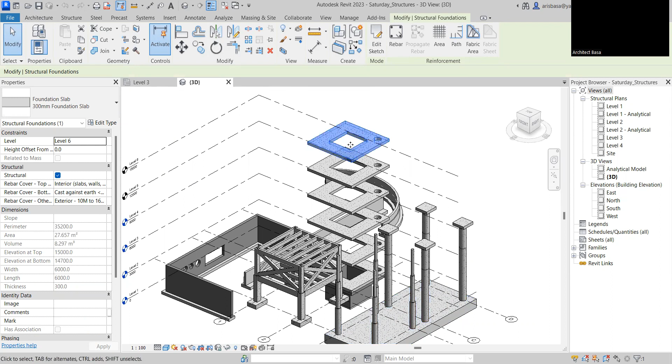Standalone. So we did a standalone structural modeling. Meron tayong footing. Tandaan nyo naman yan, di ba? Yung mga columns. Tapos we also did slabs na mayroong opening. Yan, nag-cut din tayo dun sa mga structural wall ng opening. So all these components gagamitin natin when we do the structural model of the building that we have.

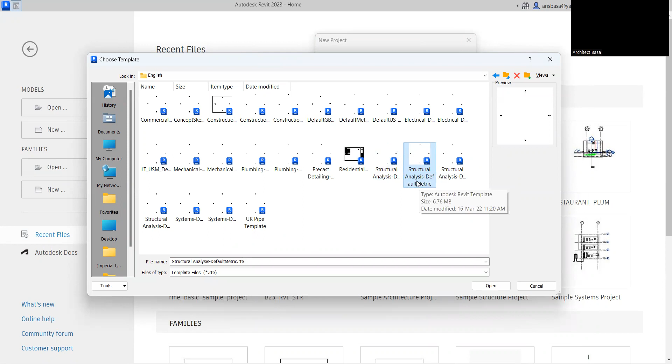So just remember, when we create something in a structure, it comes from the level going down. In architectural, from the level going up. So it serves as the support. So now we will start a new file, which will be a template. Let's go to the English template. Structural default. Go for the structural analysis. It's called structural analysis default metric. This template, it's in that folder. Then click open. New project.

All right. So the workflow that we'll follow is we will bring the architectural model as a link. Lilink natin yan. So we'll insert the link file. I'll go to my folder, documents, in focus, and Saturday building. Okay. Then the positioning will just be auto, internal origin to origin. Then click open.

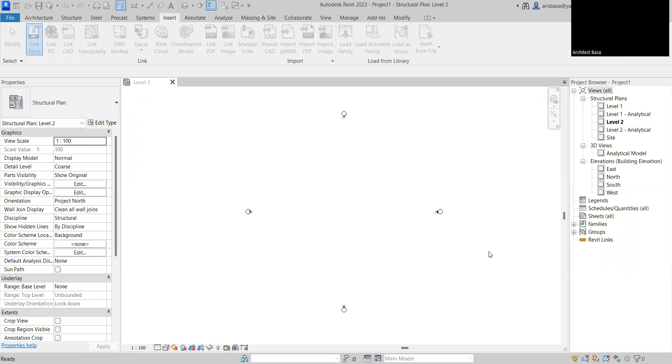So you already have the link. Okay. If we look at the 3D view, you already have the building. Don't be surprised if you don't see some of the other elements. Some of the other elements cannot be seen because they are just switched off in the visibility graphics. Yung VG natin, may mga naka-off lang dyan. See, if I check VV, visibility graphics, makita nyo, some of the elements are switched off.

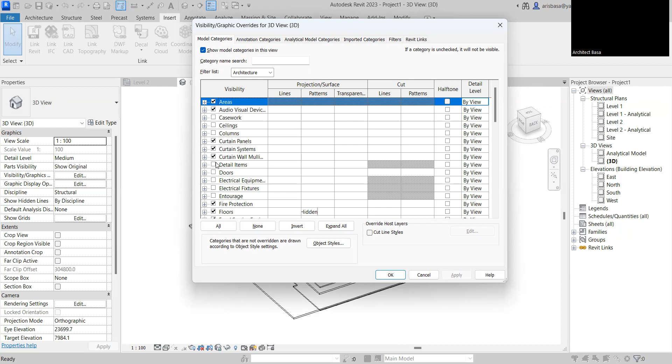Casework means furnitures and etc. And doors are switched off, see? So ngayon, if I switch on the doors, for example, click apply and okay. Yeah, the doors are there. But when you are preparing the structural model, you don't really need to see the doors. So that's the reason they have switched off the doors. So we'll just switch it off. You already have the floors here. We need the walls maybe. So let's put up the walls.

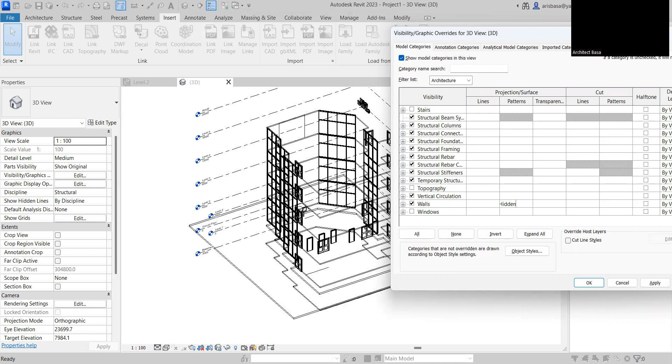So, click natin yung walls. So, if you can see, some of the walls are switched off actually. Yan, naka-hidden siya eh. Hidden yung pattern niya. So, if you want to change that, it will be changed, no? But for now, let's keep it that way and just click cancel. All right. Okay naman tayo sa ganyan.

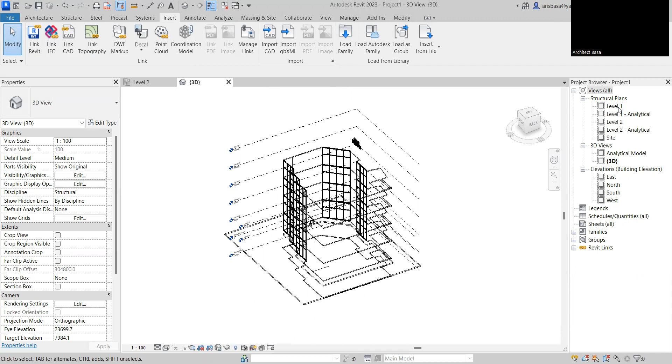So if you remember, in our architectural model, we did not put the grid yet. Do we have a grid there? Wala, no? Meron ba tayong grid doon? Let's try. Let's open the architectural. Usually, this is the link, so we should have the grid. Let's check the grid in the floor plan. Ayun, meron na palang grid. So what we will do is we will borrow the grid of the architectural model because there is no grid in the structural model. We cannot create the columns.

If you remember in the plan that we did last week, when we placed the columns, we had grids, because we place the columns on the grid. So we need to create a grid and level also for the structural model. But we will not be creating it from scratch. We will copy it from the link model. If you look first here in the north elevation, we have the levels already. In the elevation, you can see the doors, even the plants and the cars, because it has different visibility graphic settings.

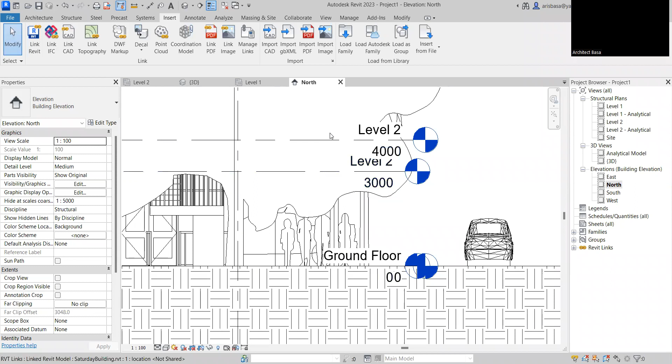So if I look deeply here in the levels, I see two levels that belong to the structural model. Itong dalawang to. I can actually click this and move them away. See, it's level 1 and level 2, the default levels. So what I can do now is modify this to match the level of the architectural model. So it's 4,000 for level 2. So I'll just modify this and type 4,000. Okay.

So there are two ways to create your own structural levels. It's either you just copy this and align it to the other levels, or we copy from the link, which is faster. So you go to your Collaborate tab. Then we use the tool Copy/Monitor. Click Copy/Monitor and choose Select Link. We'll select the link, which is this link. Then click Copy and select this level. It's copying now. Then this level, and that level. You will see that symbol; it is being copied and monitored.

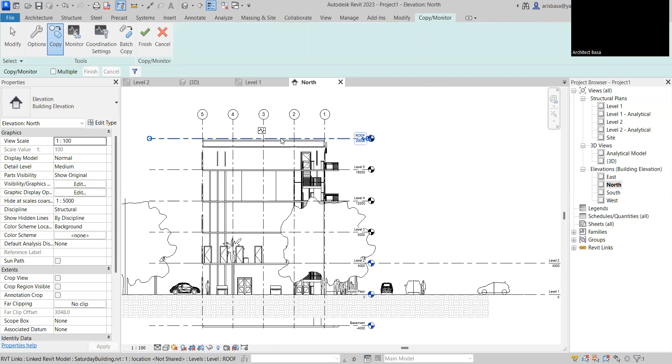What is the reason we have this monitor? If you change the height of the levels, it will send a report to Revit that you have changed the level, because it is critical in construction that you have similar levels. So now we have already copied that. We can now move these levels and align them to the other levels. So now these are our structural levels. We have now the roof and level. We don't see it yet here. So how do we do that? But first, let's finish the process of copying.

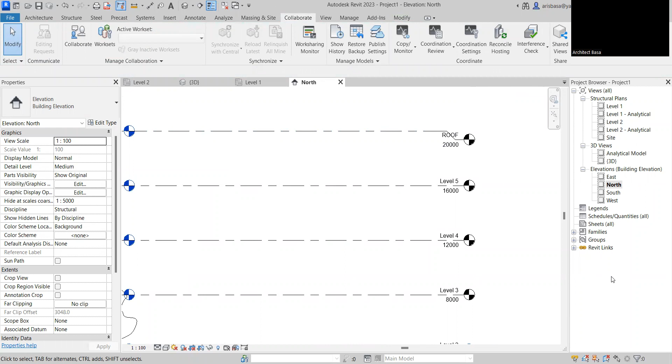Finish that. So for us to see the level 3 structural plan up to the roof, in the project browser, what do we do? Tandaan nyo ba yan? View. But this time, plan views, structural plan naman. We go to structural plan and we get all of these levels. And click OK. See, it will now turn blue. It's now blue because the levels are already there.

It will also help if we select all these levels and pin them, so that we're sure they will not be moved. Okay, so now we have our levels, but we don't have the grid yet.

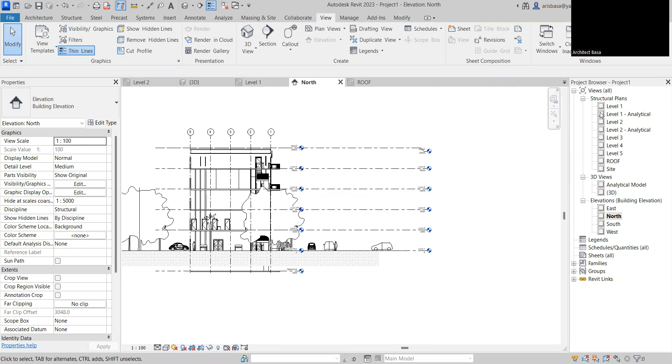So let's create the grid using the same process. Let's go to level 1 and do the same thing: collaborate and copy monitor, use the link, select this link, and this time we'll copy again.

One by one, takes time to copy: 1, 2, 3, 4, 5, 6 grids, and then the vertical grids, 7, 8, 9, 10, 11. So we already copied that, and then we click finish.

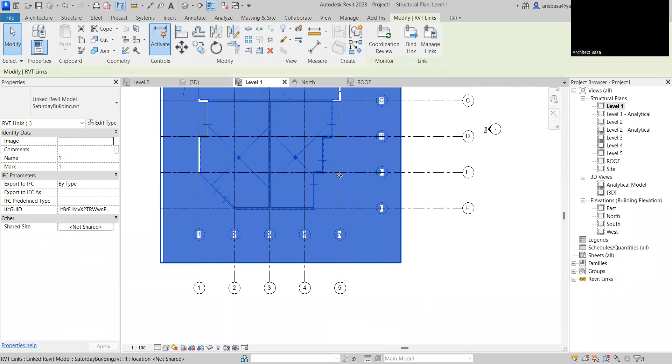So for us to identify the structural model, let's move it away from the architectural grid, similar way to this. Let's lower it down. Okay, so the architectural grid is still there, and we have copied it as a structural grid.

So to be sure it was not moved, like what we did earlier, we'll just pin this. Click pin, alright? So we know what to do now. What to do next? Create our columns.

But actually we need one more level. If you go to the elevation for the structure, we didn't copy the basement level yet. So we need to copy this basement level.

I won't monitor it, I'll just copy it directly. I'll just copy this, align it here. Okay, so that's the basement. I'll rename this as basement level.

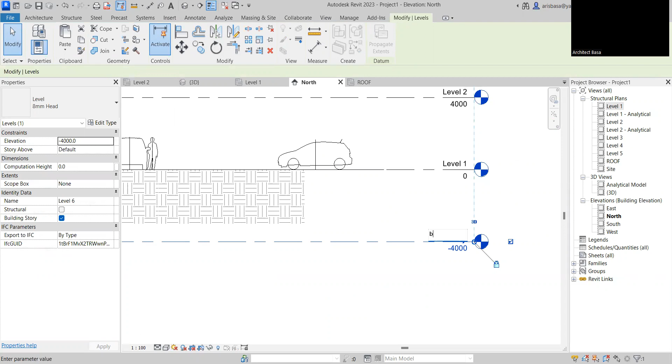Minus 4. So actually we need another level which will be the footing level of our structure. So let's create another level, copy this, another 4 meters maybe. Let's name this as top of footing.

In actual construction, usually if the building is this high, we need to have those pile supports, but we'll just keep it simple. We'll just make an isolated footing for the building.

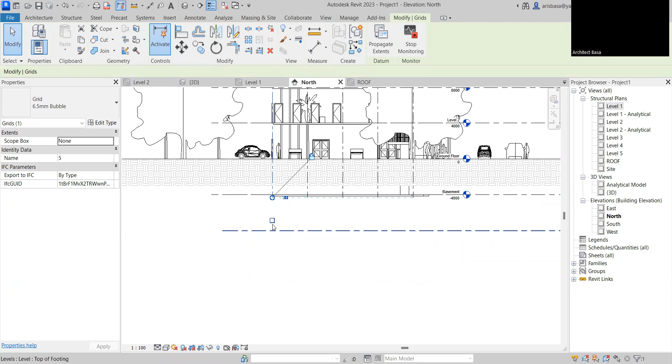So our grid, let's make sure that the grid goes down all the way to the basement level. Same thing: pin, unpin, move it down so that it touches the bottom level. And then let's go to the east elevation.

Do the same thing: select that, unlock, unpin, and then push it down. Okay, we can also adjust the levels here on the right hand side. Lock and unpin, unlock, and then move it.

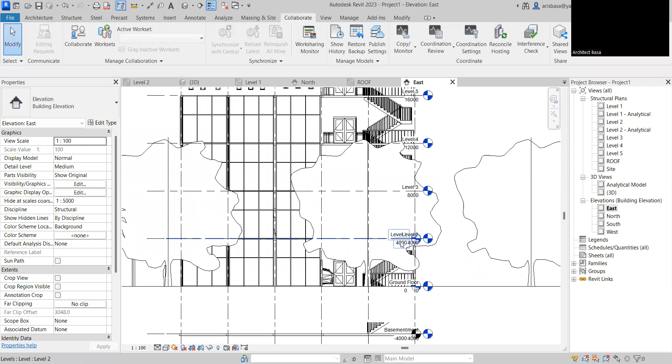It won't move. Sorry, it's just the levels. Levels, unlock. Where's the pin? But it won't move. Oh, it's pinned. Okay, move, unpin.

And let's move this here. Yeah, as a batch, let's pin it. We can move it like that. Okay, then we can now pin them again. Let's just pin that.

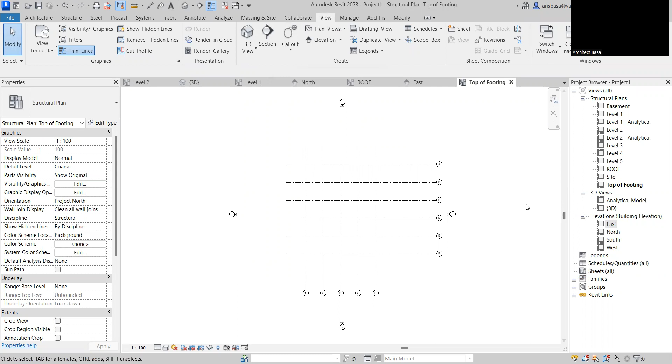Okay, so now let's go to our basement level, which isn't here yet. Again, we'll do what we did earlier: View, plan view, structural plan. Let's get the top of footing and basement level. Okay, there's our level now. Let's go to basement level.

And let's create our columns. Okay, so under structures, by default we have steel column and rectangular column. So let's use the rectangular column right now.

Let's say at the basement level, let's use some big ones, 600 by 450. How to do that? At the grids, right? We'll just click at grids, then select all the grid. There we go, now we have the posts, so we have the columns, and then click check.

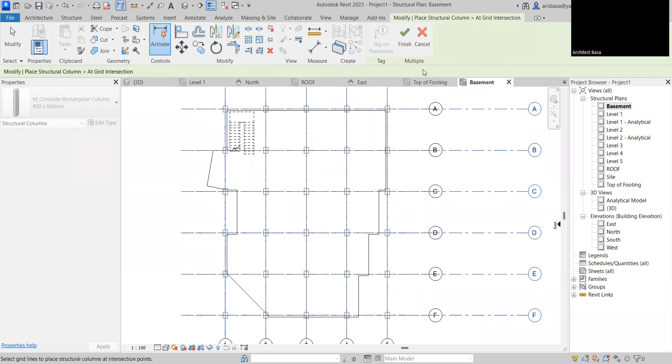So for example, if you have grids with columns that you don't need, you can just delete them. But for the purpose of this class, we'll just keep all of these grids for all of these columns for now. So once you place your columns, check your 3D model.

But before that, let's select all the columns, so all the columns are highlighted, and then let's look at the 3D view. Yeah, so we already created the columns.

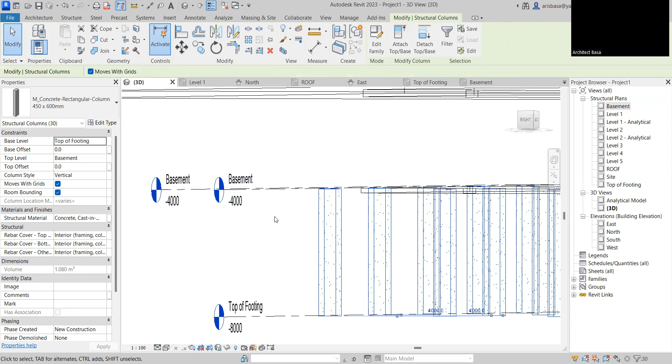So the columns are placed from the basement floor going down to the top of footing, which is good because that serves as the foundation. Okay, so now we can place our footing to each of the columns.

So let's go now. Let's go to our top of footing level and then we create the footing. We'll just use the isolated footing under the structure tab. Click isolated, and then let's choose maybe the big one, 2.4 by 1.8.

And then what we'll be using is add columns. Click add columns, select that, and then you already have the columns in place. And then finish. In the 3D view, it looks like this now. Yeah, right? So we have this.

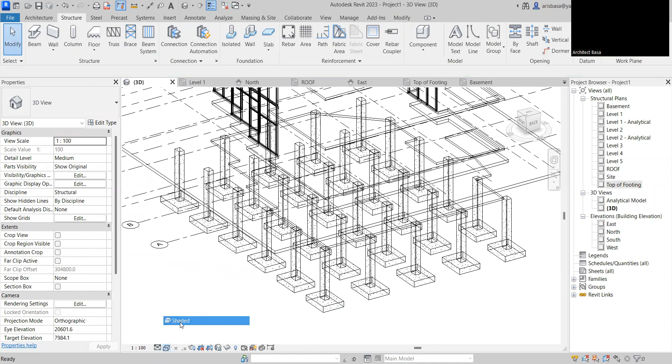This is your shaded view. Okay, you'll have that footing.

Okay, so now what we'll do is we will copy the columns. Select all instances visible in view, so it will select all the columns. And what we'll do, we'll just copy it: copy to clipboard and paste it, align to selected levels.

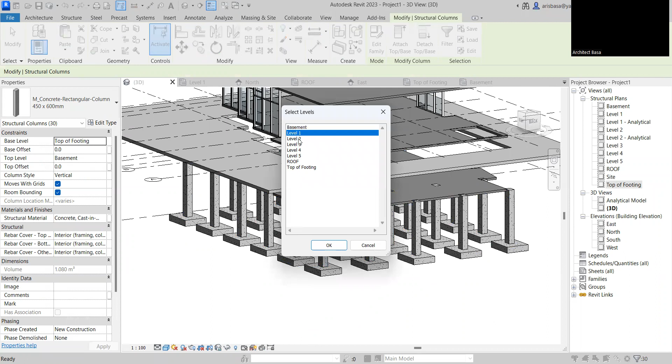So the level that we'll place it to will be level 1. Okay, level 1, click OK, because we start from the bottom going up. So we already have that. So let's say we agree that we'll use the same size.

So it's okay. The same column, we'll place it on the upper floor. It's still copied, so we can paste it again to level 2. Click OK. There it is, level 2.

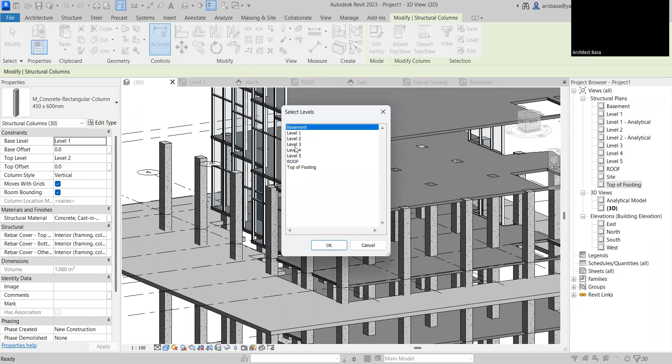Alright, so we have the level 2 columns. Let's say we decided that this column should be a little bit smaller for structural purposes, but I think it should still be this much. Let's just change it on the upper floor. Copy and paste again, align it to level 3. Okay, so those are the columns at level 3.

This time, let's make them smaller. Let's use the 300 by 450. The same thing, let's copy this again and paste it to the other levels, level 4 and level 5, up to the roof, and click OK. So we've placed them up to the roof level.

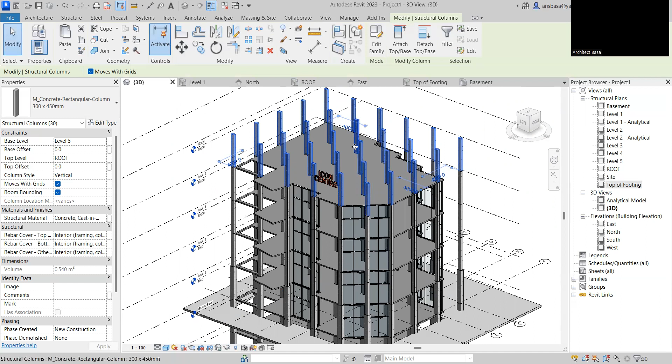Do we need columns on the roof? I think we don't need columns, but we need it on the other side where we have the sloped roof. So what we'll do is remove them manually. We can just select and delete the columns we don't need here.

Manual na lang. Some of the columns that we don't need, we just select and delete. Don't need that there. Actually there is a parapet here, but I don't think we need that big of a column, so we don't need this also. And these other columns, we need to shorten them.

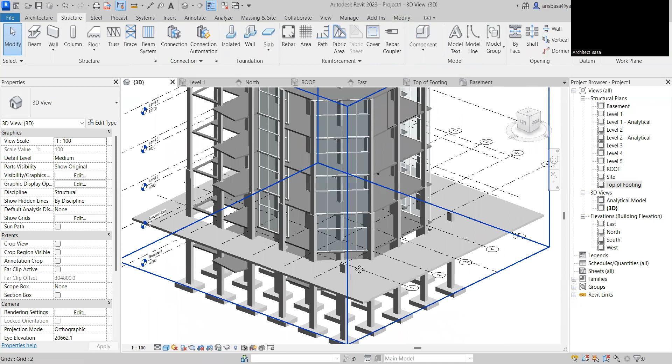So later on we'll adjust that. Some other columns that we don't need, just manually delete them. Here maybe we'll decide later on since we don't know yet where the roof is.

Okay, so we already have the columns and the footing. What is next? Let's create some tie beams at the bottom floor so it won't tip over, for additional support.

So let's create a beam at the top of footing. Let's go to top of footing, and make a tie beam all around. Maybe just this one, all around, and then the one in the middle.

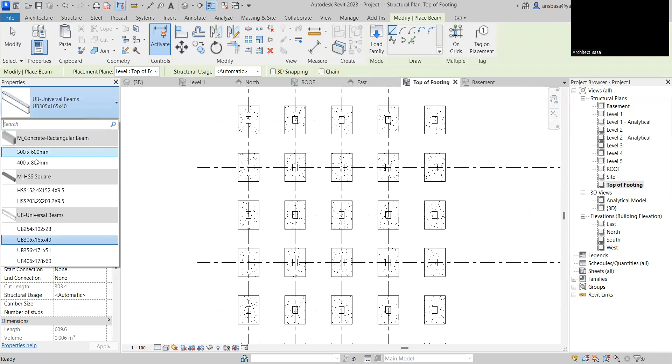So let's go to beam. By default we have the steel beam and the concrete beam. Let's use the 400 by 800. To create a beam you just need to click on the edge of the column from here going to the other side. Wait for it, and that's the beam already.

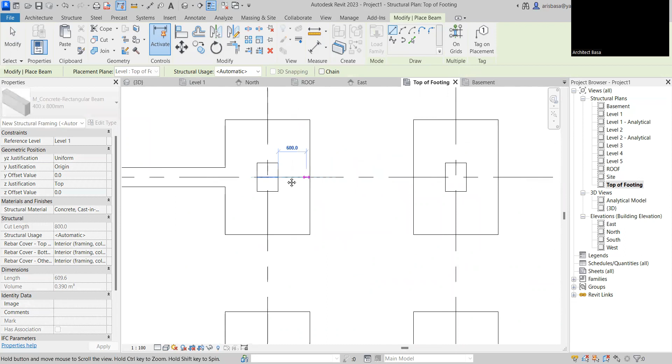So you can do that and click there. You might ask, why don't we just do it from end to end? There will be a clash in the concrete volume, doubling it at the column and at the beam, so we don't want to do that.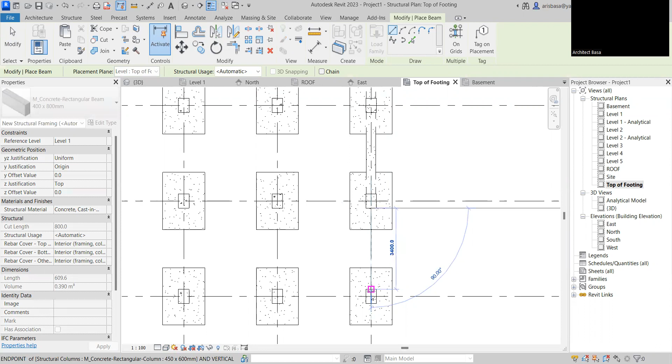Then we just keep doing this, one by one. You can also copy one beam and paste it to the other, but since it's not that much work, it's okay to do this one by one, because sometimes we want to make sure it's attaching to that edge.

Structural modeling is easier than architectural modeling. I will undo that. Since you already know architectural modeling, this is easy now for you.

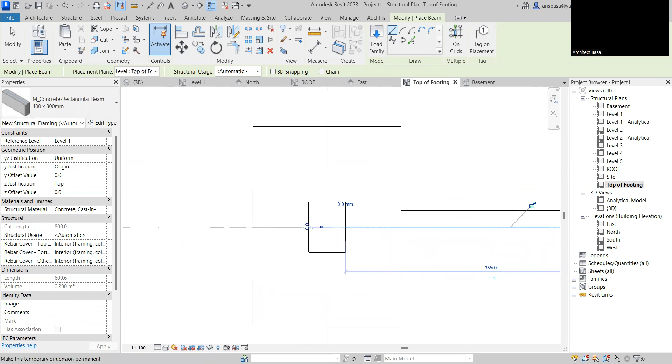The next thing we'll be doing is our slab. If you remember, we did a slab edge, right? Then we'll just do a slab edge.

Let's try to copy the other columns, the beam. I will select, then use the filter tool. I'll remove the columns and remove the foundations so I have only the structural framing.

Do we have a student online? Wala naman, huh? And then we click apply and okay.

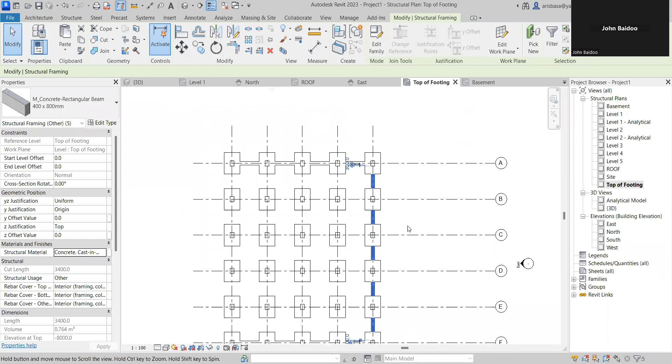So that is only the beams. Then we can copy, I will copy from here.

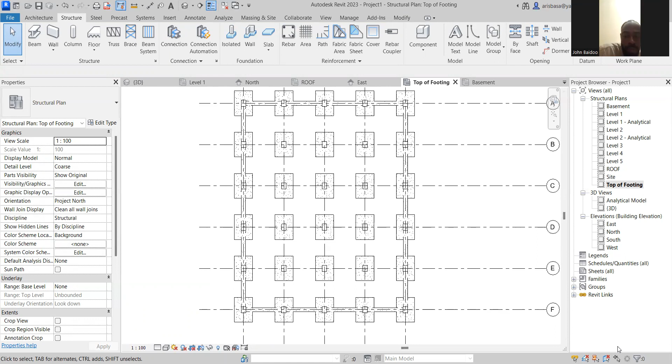Yeah? Can you see me? Hi, we can see you. You're good looking.

John Baidoo, your friend Kuya is waiting for you because he is alone today, nobody is teaching him. I'm sorry, I'll come next week.

Okay, so today we are creating the structural model of our building. Let's look at the 3D now. We already have this, but the beam looks wrong. It's wrong, right? The beam should be on top of the footing.

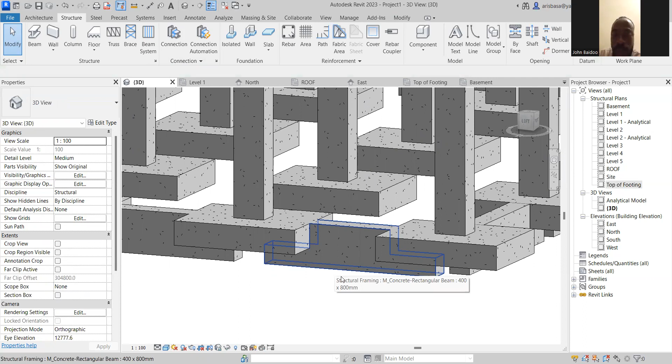So what we will do is modify this. What is the thickness of our beam? It's 800 for the height. So we'll select all the beams, select all instances visible in view. We selected all the beams, so here we will modify it. We will add a start level offset of 800 and also an end level offset, the last end, which is 800 as well.

Yeah, I think this looks better now, it looks more proper. Okay, so if you want it in between the levels, we can increase the height.

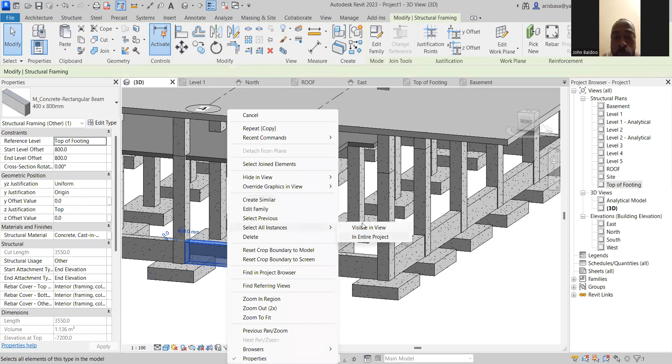So let's do that again. Select everything in the view, and then let's add, maybe let's make it 1,800 or maybe 2,000. 2,000, at least it's in the middle point of the column. Oh, I think that looks better.

Okay, so our structural engineer here, Kuya, has approved it. Okay, so there you go, we already have a beam.

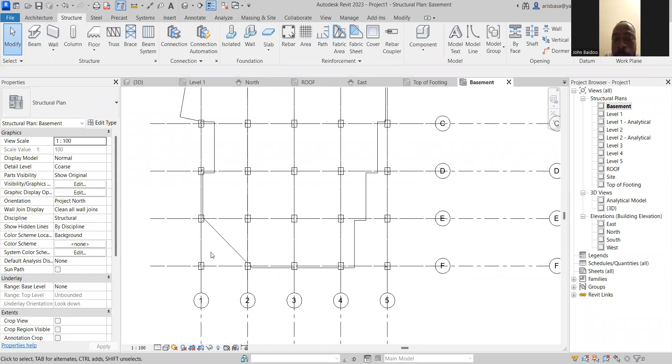So next is to create a slab at the basement level. Let's go to the basement level. So let's assume that the basement level floor will be from column to column. I don't know why we did this at the architectural level. Later on, maybe we will modify the architectural model, and since the owner still owns some part of that land at the bottom floor, we can just use that as the basement level.

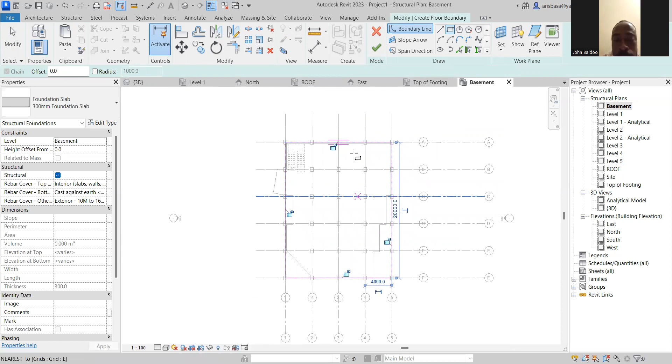So let's create a slab, structural foundation slab. Maybe we'll use a 300 mm thickness, at the basement level, and then we'll just draw a rectangle from this grid up to this grid. So that will be our foundation slab at the basement level, click check, and it looks like this now. Okay, so that will be our foundation slab.

There is actually a clash between our slab and the architectural floor, but usually in actual practice, the structural slab is used as the floor of the basement. We don't want to put additional screed there because it's usually used as a parking area, so they will just paint it with epoxy paint. We don't really need an architectural floor at the basement level. So later on, we will tell the architect that you don't need to create a floor at the basement, just delete your floor and use the structural floor instead.

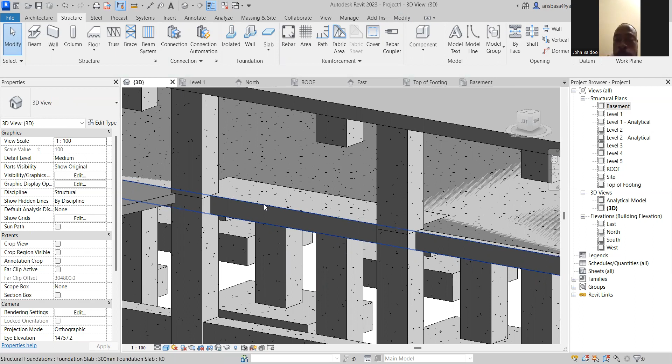Okay, so that should be fine. Now what can we do here? What should be the next thing? Slab edge. So let's create a slab edge around the structural slab that we did. Should be easy, John Baidoo can do this.

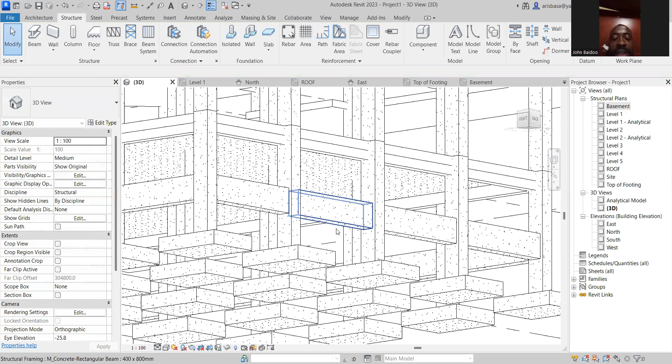John, are you using your laptop or are you on your phone? I'm on my phone. Okay, anyway don't worry, this is being recorded, you can watch this video later on. Okay? You're walking, huh? You're in your house now? You don't have any visitor there or something? Are you sure you don't have any visitor there? No? I mean, yeah, your roommate, maybe your roommate has a visitor today.

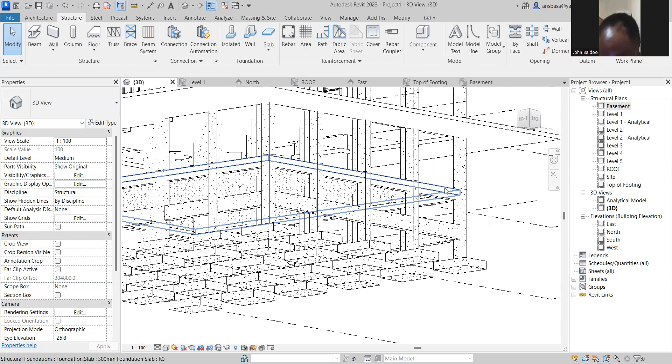Okay, so let's continue. John, we were talking about garri. I'm eating garri now. Yeah, right. So next week you have to bring some garri, so we will let them taste garri. Okay? He's eating garri now. We have to bring some garri next week. Garri photo. Yeah. So we'll give them some garri photo, okay? Okay, I'm eating some right now. Wait, okay. Okay, all right.

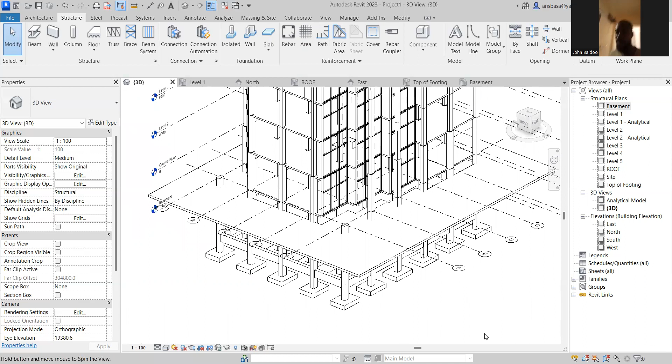So we'll remove some of the other columns that we don't need.

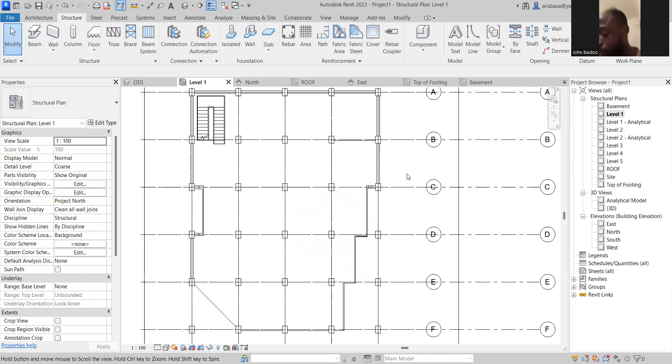So now let's go to the ground floor, level 1, and let's do the same slab. Simple slab. This time we will follow the architectural lines of the architectural slab. So let's do the slab. We'll just use this tool, pick lines, and then choose the lines of the architect's floor. Where is it? This one. The exterior line. This. Just one by one.

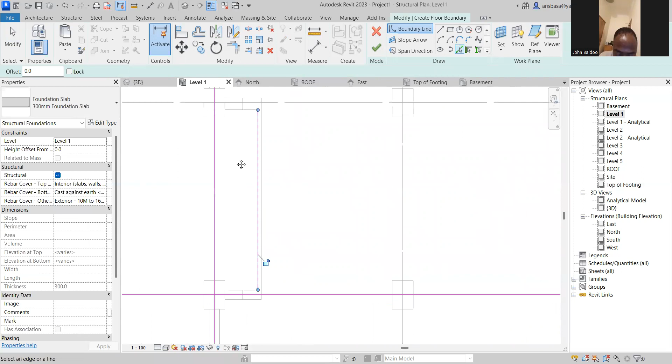Here. The architect's model is a bit off. Anyway, in Revit, we don't really worry about having it super correct because we know that we can easily modify the model later on. Okay. That's the floor. I think we should choose the edge, right? Because that's where the wall is. Okay. Select this and let's delete this.

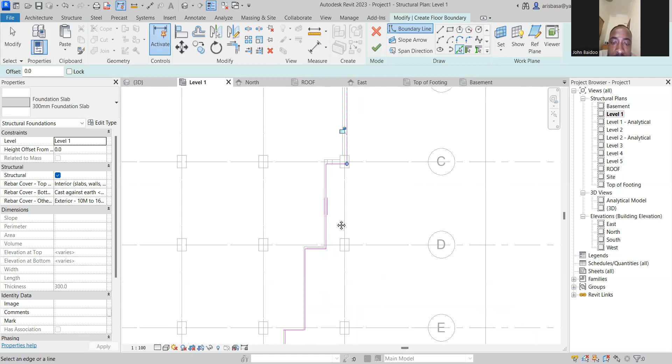Okay, that is closed. We have to make sure that the lines are closed. Select this line as well. And now, I think we need to delete this and select this line. Okay, looks like it's closed. Oh, not yet. Let's choose this and that. Yeah, it looks like it's closed now. We can click check. Oh, there's a message saying lines cannot intersect each other.

So there's a problem. Revit will tell you where the problem is. You can actually see it. If you zoom in, there is a line which is orange. So it will not let you do things that are wrong. So you just click continue. Don't click quit sketching because otherwise it will stop the process. Just click continue. Then you modify what you need to modify here. So it seems like there's a problem here. See there, it is not connected to that.

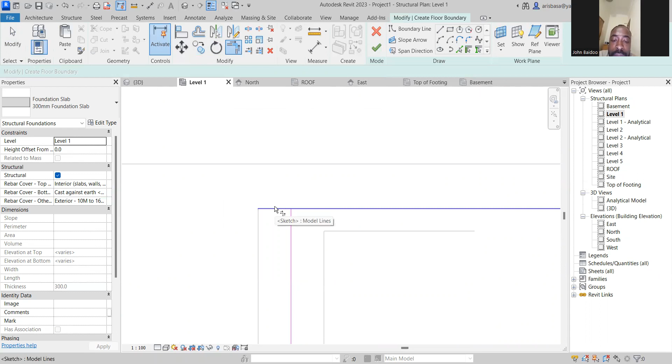So we just use our trim/extend to corner. Click there and here and there. It's now connected. Let's check here. This one has an extra. So if there's an overlap and there's a missing line, you need to close that. I think you already studied that in architectural floors, right? It's similar. Click that and that. And it seems like here also we have a missing line. There's a gap. We close that. So now we seem to have solved the problem.

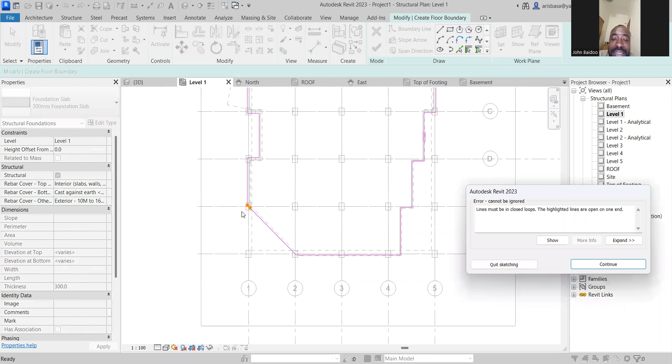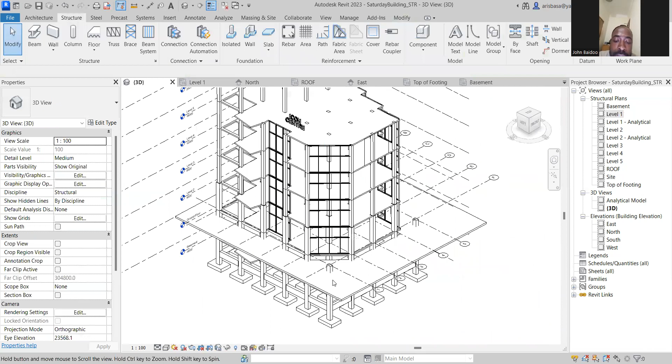We click check. There's still one. So there's a problem, not connected. Click continue. And then we just click and click there. So we'll find out if there's still more problem. Oh, so there's no problem. We'll save this now as our Saturday building underscore str for structural. Okay. And options is 3. Click OK and save it. Okay. All right. So if we look now at our 3D model, we already have the slab for the ground floor. Okay.

So our floors for level 2 up to the roof are typical. So we just need to copy that on the other floors. But here, our problem is we did not give it an offset. It is now clashing with the architectural floor. So what we need to do is give it a height offset of minus 150 because the thickness of the architectural floor is 150. So we go down 150 millimeters below it. So now we don't have any clash.

Our slab now is placed. If I shade this, our slab is now placed just under the architectural floor. Yeah. This is our structural slab. This is the architectural slab.

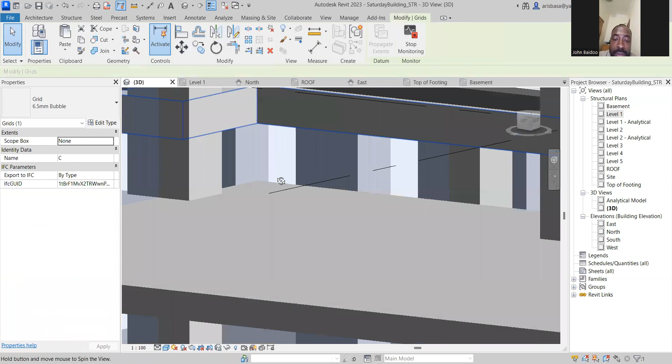No, here we are usually now using flat slab. We don't use any beams here. Sometimes we need some drop panels, but in general we use maybe a 250 thick slab because that will already have the double reinforcement. So it's like a big... It has hidden beams too? Hmm? Just the panels.

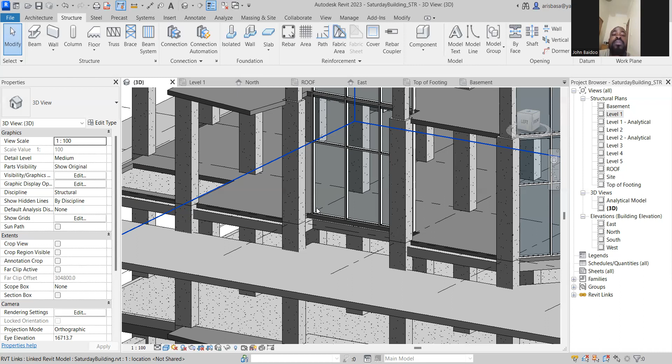So just to make our life faster, we will copy the floor, put it on the upper floor and then modify it. We select this level 1 structural floor, copy it to the clipboard, and paste it aligned to the selected level, which is level 2. Click OK. There is our floor, but we need to cut it, and also at the staircase, but we'll do that later on. We'll also make a shaft similar to how we did it in the architectural, but we need to modify it based on the architectural floor.

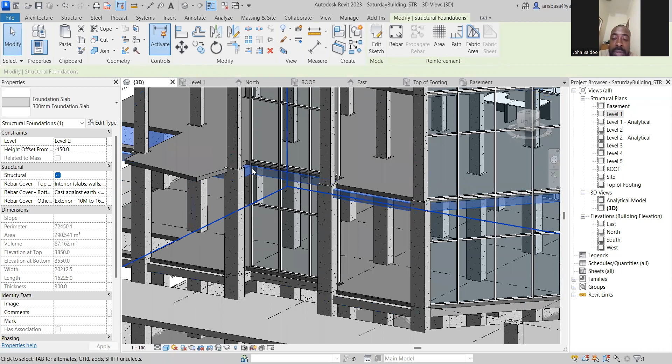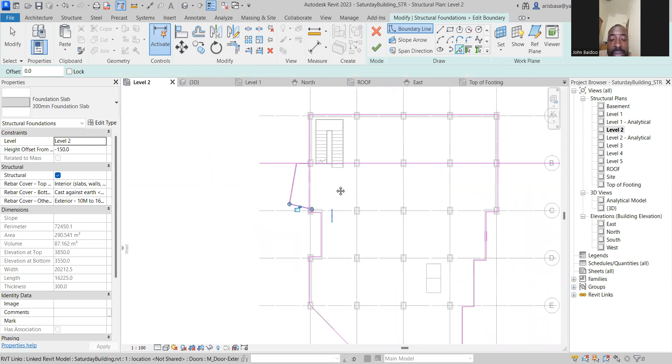Let's go to the level 2 floor plan. So this is our architectural floor, and this is our structural floor. We'll edit the sketch and copy our architectural wall. I'll click pick lines, and click this edge and that edge. Seems like it's okay now. We'll make sure that we trim using this tool. There is a line here that is supposed to be removed. We don't need that.

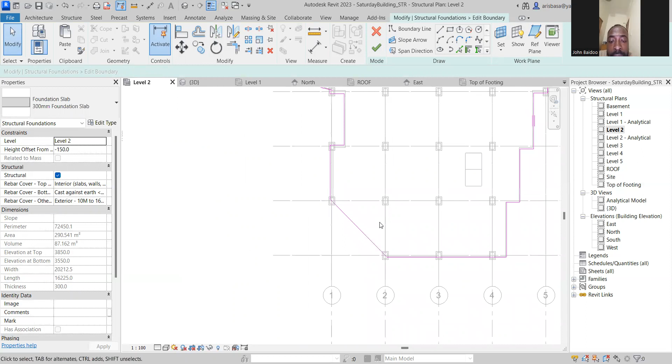Then here we have a missing line, so we draw a line here and connect it together. Hopefully there is no hole or gap. Then we click check. Revit found an error there, so we discontinue. I think we doubled the line; there's an extra line. So we use Trim/Extend to Corner. Click and click. Click check and we're done.

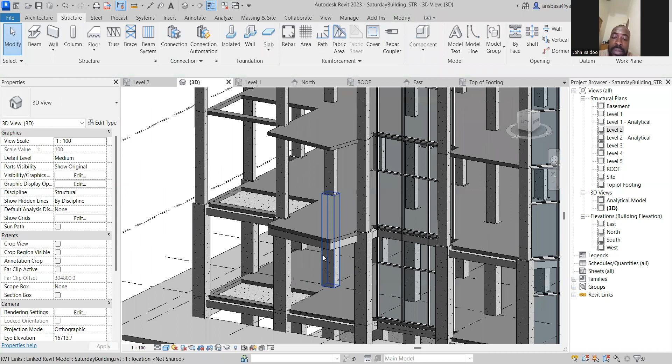Now let's look at the 3D. We have our structural floor and then the architectural floor, which is usually made of the finish and the screed. It looks okay now, so we can copy this to the other floors. Copy and paste it to levels 3, 4, and 5. Click OK. So there you go, you already have the structural floor. We just need one more thing, which is the shaft to open this slab.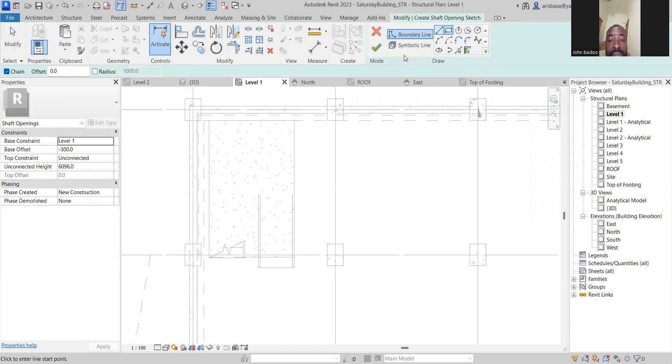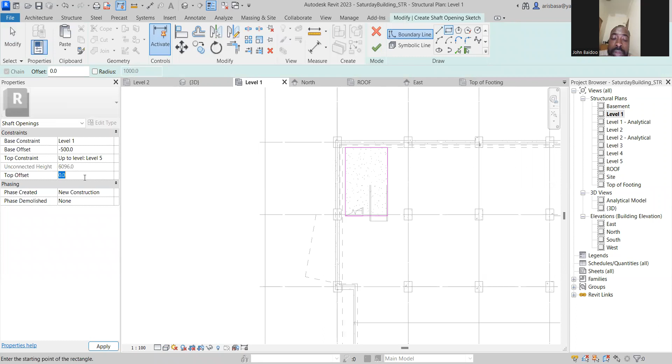Let's go to level 1 and use the shaft, the same command as in the architectural. Click shaft and draw a rectangle from here to here. Keep the base at level 1, and make it minus 500 to make sure it cuts the opening. The top constraint will be level 5, with a top offset of 500. Click check. In 3D, we already have the shaft and the hole, so there's no more issue with the staircase.

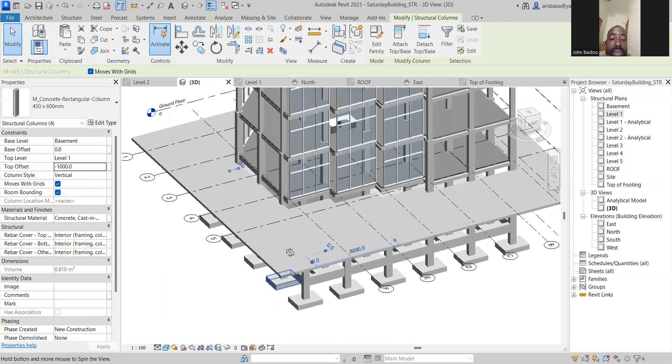So this time, the engineer is done preparing his initial model. Of course, he still needs to adjust this a little bit. You need to lower it so that it will not protrude on the road. Let's give it a top offset of minus 1,000. Okay, it looks okay. All right, so the structural model is somehow completed.

I think we need a retaining wall, right? A retaining wall at the basement. Usually the wall at the basement is structural, for the lateral loads. So let's go to the basement and let's create a structural wall, which is this. And let's choose a thick wall, 300 mm concrete. And let's just draw it straight away from here.

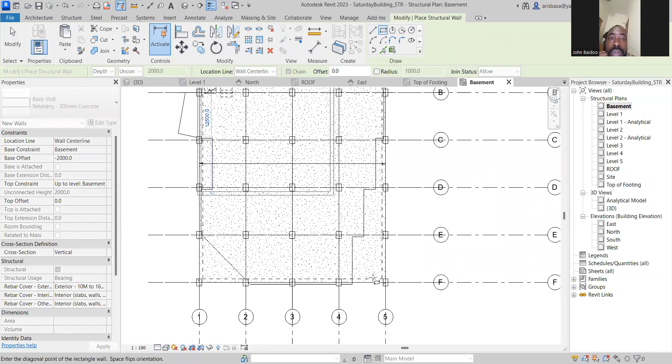Now we can just draw a rectangle from here up to here. Keep it simple. Okay. Then let's look at the 3D. You already have that, but it's a bit... let's select all of it, select all instances in the view. And then let's make sure that it goes up to the ground level, which is this, up to the floor. So from the basement, it should reach up to level 1, okay? And there should be no offset, this should be 0.

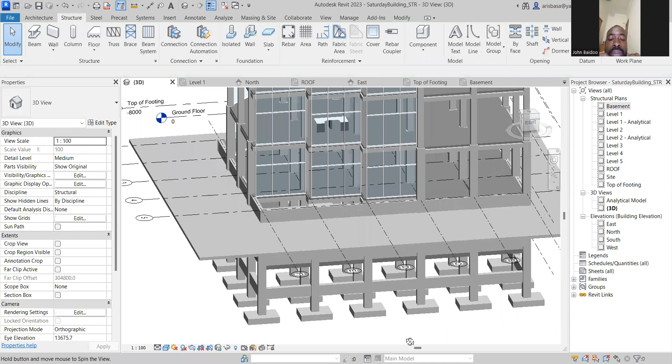So that is now the column, okay? So there's still some issue here. Later on, we can modify that. So maybe the architect can put the planter box here if he wants to use it as a planter box. But let's submit this now to the architect and let him comment. Okay. So the structural model initially is done. Make sure we save it. And then we close the file.

Now let's go back to the architect, Saturday building. So the architect's building would look like a real building now because we'll put on the structural component.

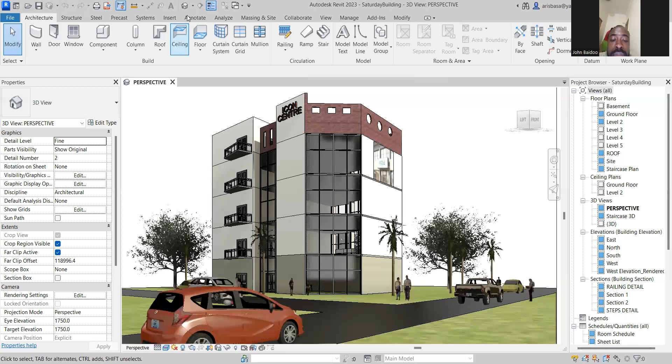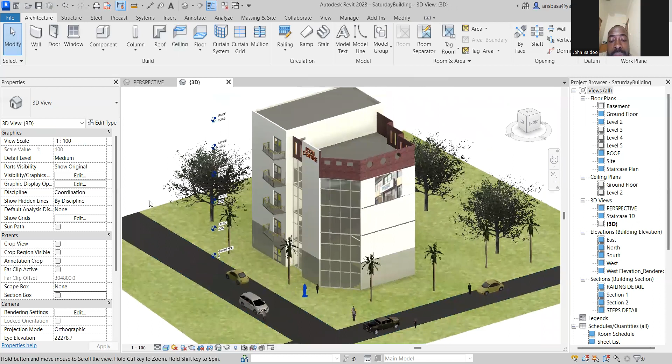So let's look at the 3D view of this architectural model. Let's remove this section box. Yeah, so this is the architectural model that we did with the basement. And now let's bring in the structural model that we did. Similar way, we insert, link the file. So we'll bring in the Saturday building structure, which is this. Internal origin to origin is the positioning, and click open. So it's there now.

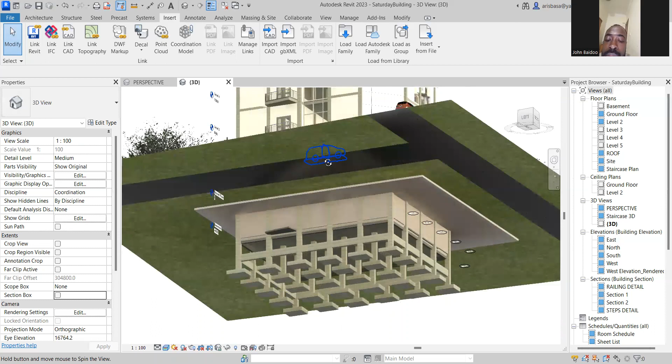So we are expecting... there's the roof. Okay, so obviously we need to do some adjustments on some of our columns. Okay, so now we can see that we have the basement, nice basement already. You like the basement, John? Yes, sir. I can see it. All right, that's good. It's actually buried in the ground. So our ground is this actually. So we're okay.

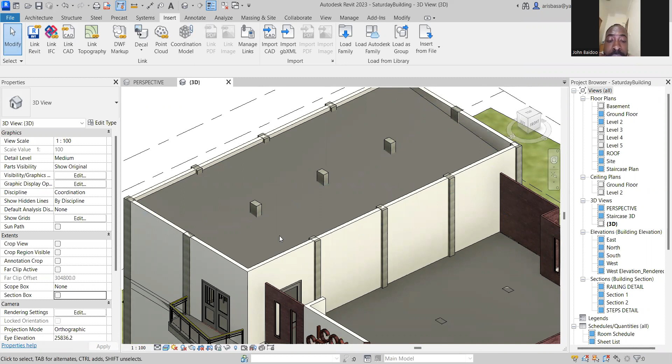So this is now the architectural model with the structural model, the initial coordination being done by the architect and the engineer. So obviously maybe some of these columns are not required. These 3 columns may not be required. They can be deleted because we can just create a steel truss here for the roof, and maybe we'll need 1 beam here to connect from here up to there. Okay. So that is the current status.